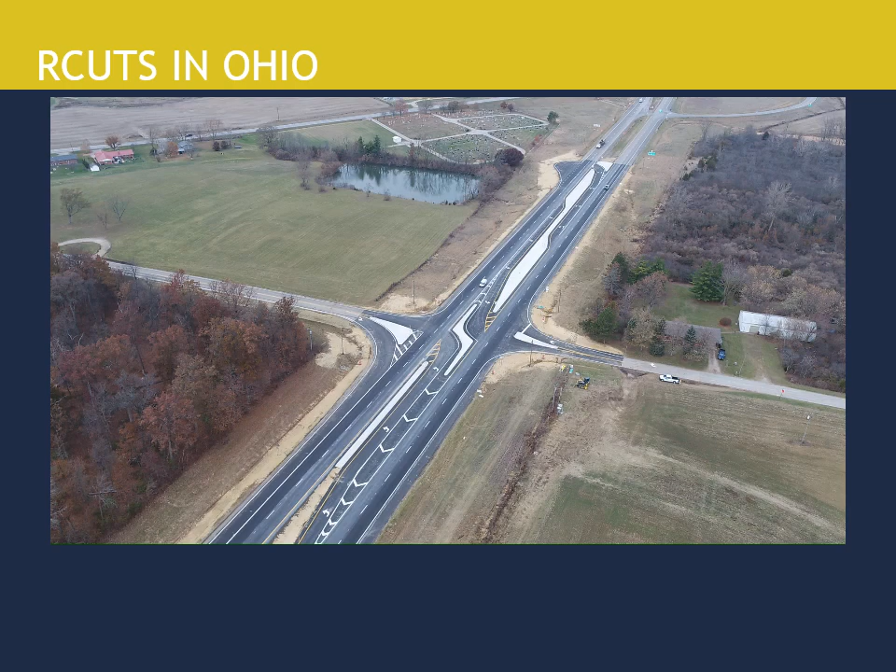But what is an R-cut? Well, instead of crossing over 4 lanes of high-speed traffic on a divided highway, drivers will wait for a gap and turn right in the same direction as mainline traffic, utilizing a designated acceleration lane. This acceleration lane will keep side street traffic entering from a stop condition from merging with mainline traffic traveling at a much faster rate of speed. From the acceleration lane, traffic will safely turn downstream to a median U-turn and turn left to head in the opposite direction. All traffic movements through the intersection, whether it be crossing, left turn, or right turn, are accommodated by an R-cut.

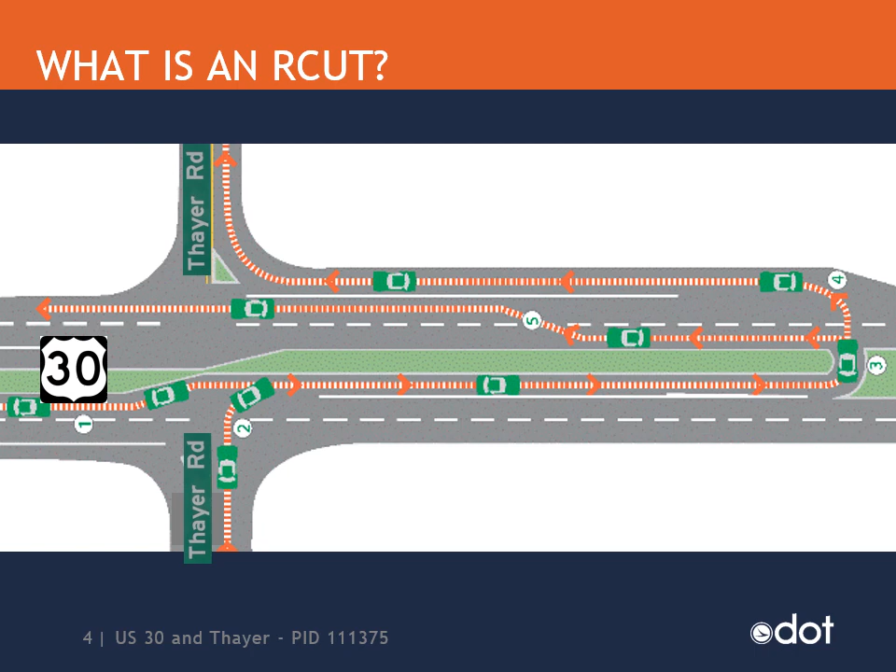A typical crossing on a 4-lane divided highway has 32 possible conflict points, or points where opposing vehicles cross paths. What's worse is that the majority of these conflict points often result in severe, high-speed crashes from opposing directions of traffic. These types of crashes, head-on, T-bone, or high-speed rear ends, frequently lead to serious injuries or fatalities.

However, by installing an R-cut, the conflict points can be reduced to 14 or fewer depending on the specific layout of the R-cut. Typically, this will result in less severe crashes with mostly same direction traffic, such as sideswipes or lane changes. Most importantly, these improvements have been proven to reduce fatal crashes by 70% and injury crashes by 40%.

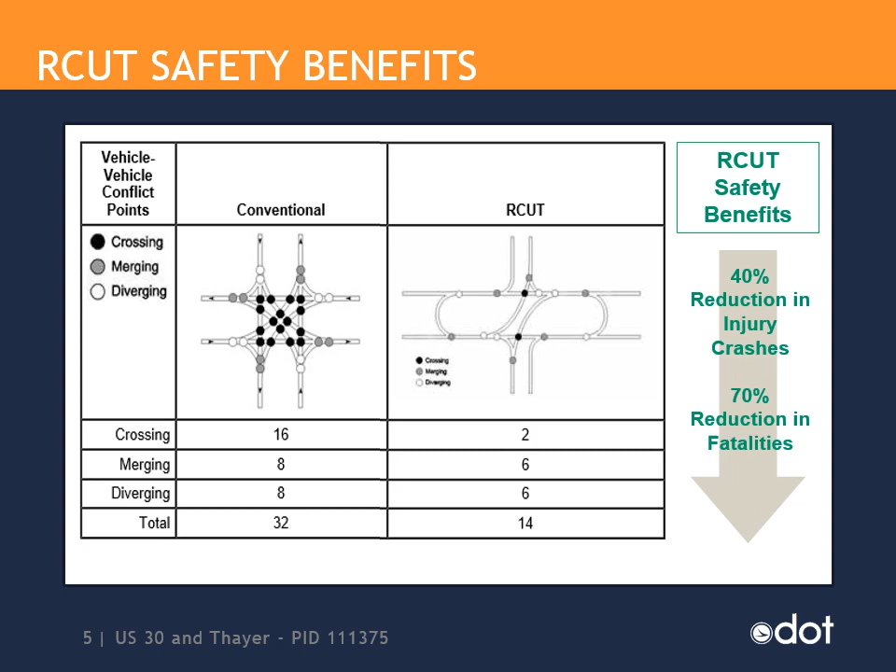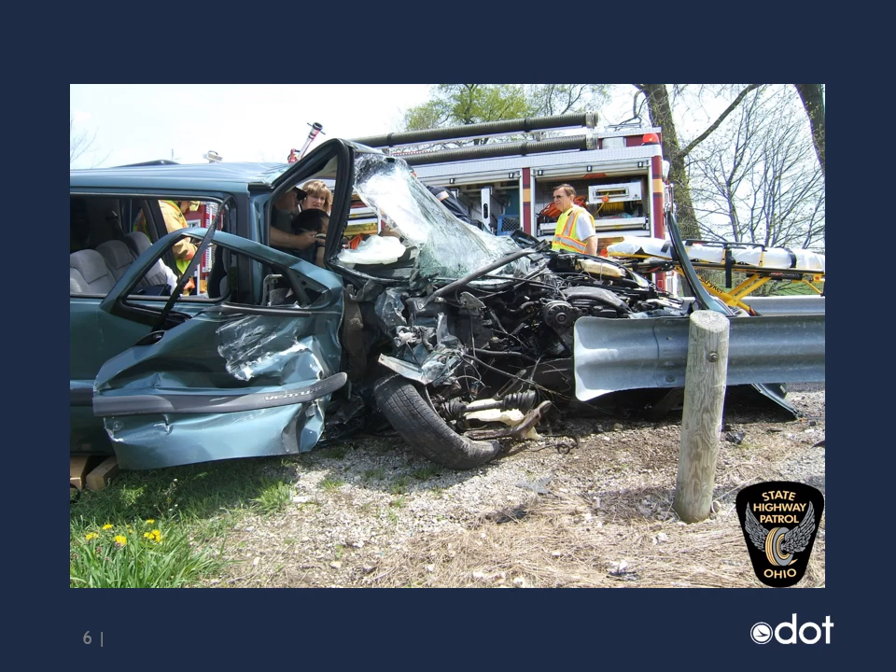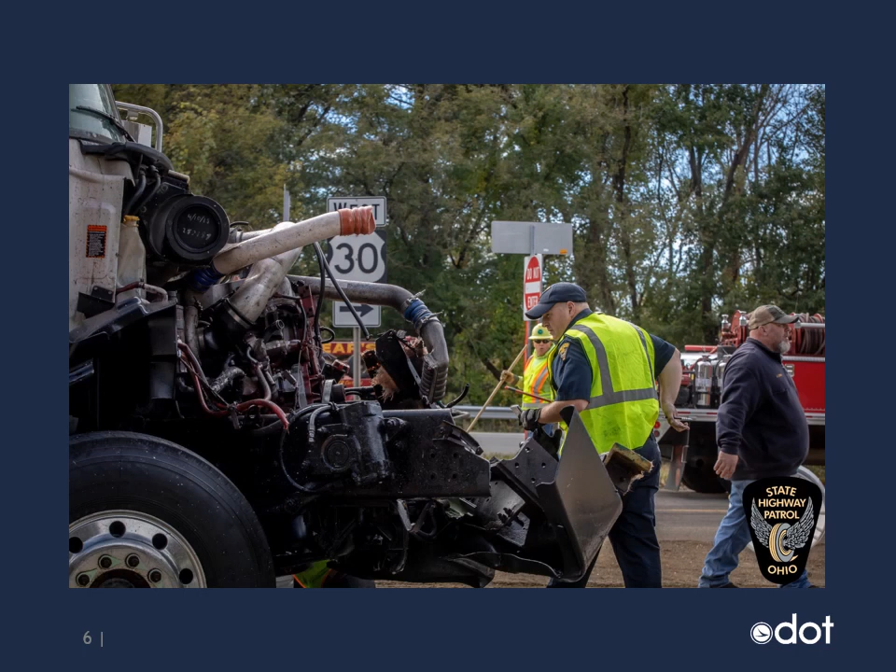I'm Sergeant Ryan Papura with the Ohio State Highway Patrol. Oftentimes, the crashes that troopers respond to at grade intersections are catastrophic, where the potential for loss of life or severe injury is high. Vehicles traveling at highway speeds can have devastating effects when striking a vehicle that fails to yield at an at-grade intersection. R-cuts will not eliminate all crashes from occurring, but they may translate those crashes that do occur into sideswipe or lane change type crashes, possibly reducing the severity of a traffic crash and making it safer for the motoring public.

This short video shows the operation of a typical rural at-grade intersection with a 4-lane divided highway. This is very similar to what we are currently experiencing at Thayer Road. Let's watch.

Although drivers will have to drive slightly further to get to where they want to go, R-cuts can take the same or even less time in comparison to when drivers must wait for an appropriate gap to cross a divided highway. When making left turns or through movements, a driver is dealing with 4 lanes of traffic going in 2 opposite directions. Larger vehicles, such as this semi, or commercial or agricultural vehicles, must wait for all 4 lanes to clear because there is not enough room to sit in the median.

This can result in a traffic backup, also known as a queue, on the side streets. Queues can add significant delay to crossing an intersection. However, when navigating an R-cut, all traffic is only concerned with making a right turn into 2 lanes of traffic going in a single direction. Decision-making is simplified, and queuing is less likely to occur, creating a safer, more efficient intersection.

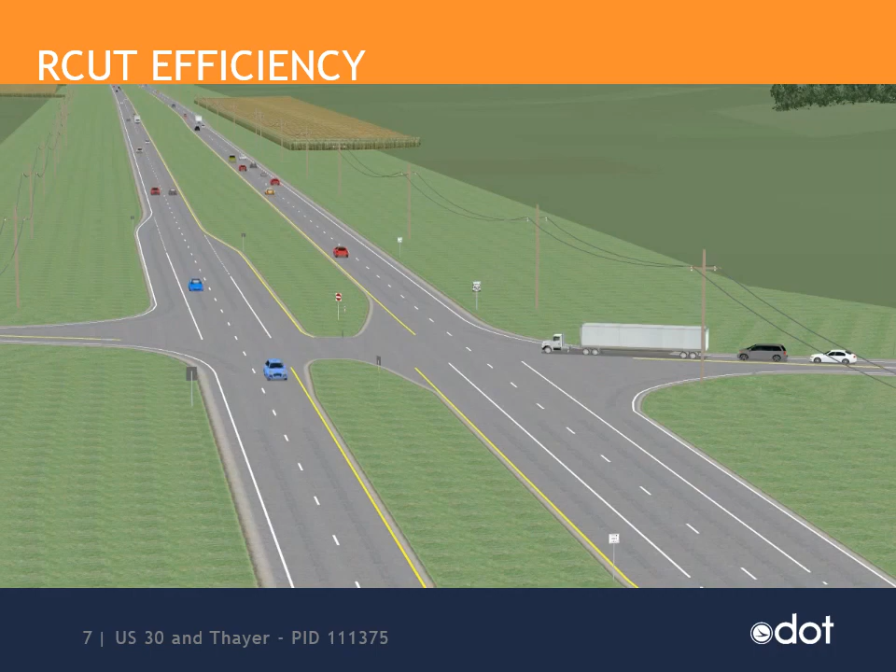Hello, my name is Angie Boyce, and I am the Project Manager and Senior Transportation Engineer with Stantec Consulting Services, Inc. out of Columbus, Ohio. We are working together with ODOT on this project located in Allen County along US 30.

Over the next few slides, I will further discuss the background and need for this project, the intersections that will have altered access to US 30, and the new suggested traffic routes once the intersections are modified. There will be a few short videos of vehicle and farm equipment simulations navigating the R-cut, and lastly, I will give a quick overview of the project and construction schedule.

In 2019, the Ohio Department of Transportation District 1 conducted a long-term corridor access study to identify improvements that could be made to the at-grade intersections along the US 30 corridor. This study involved identifying a long-range plan for all the at-grade intersections along US 30 in Allen County and some in Hancock County. A controlled access highway requires removing or modifying at-grade intersections, making direct access to the highway prohibited.

Doing this greatly improves the overall safety of the highway by reducing crash or conflict points at these intersections. Safety has always been a top priority for ODOT, and at-grade intersections have become a focus due to the upward trend in critical and fatal crashes. The information obtained from this study was utilized when developing feasible alternatives for this project.

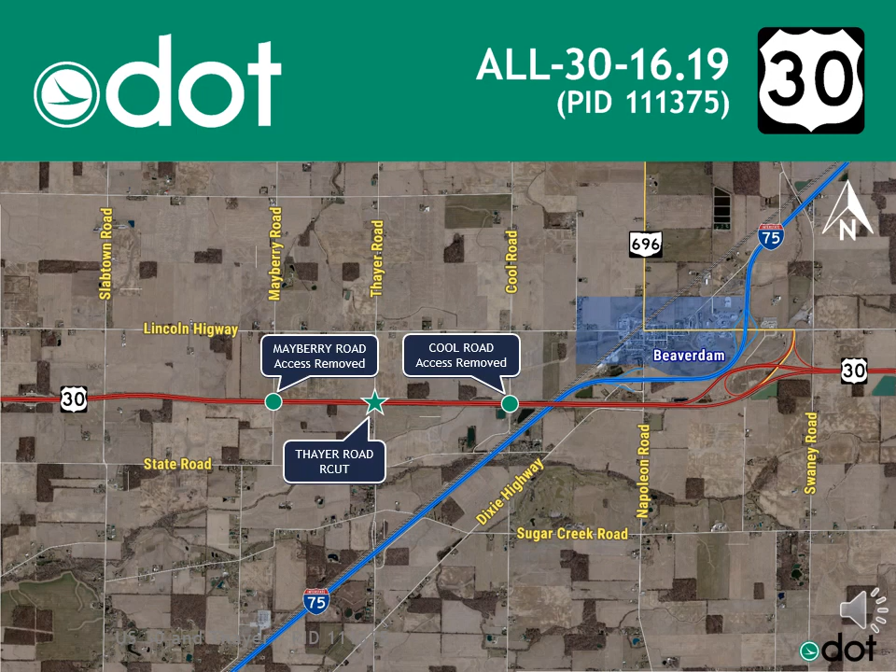After careful consideration of all these factors, here are the recommendations for the following intersections. Mayberry Road and Cool Road will have direct access to US 30 removed and will become cul-de-sacs. The intersection of US 30 and Thayer Road will be modified into an R-cut, which was explained earlier. Over the next few slides, I will explain these proposed modifications in more detail and discuss the new traffic routes.

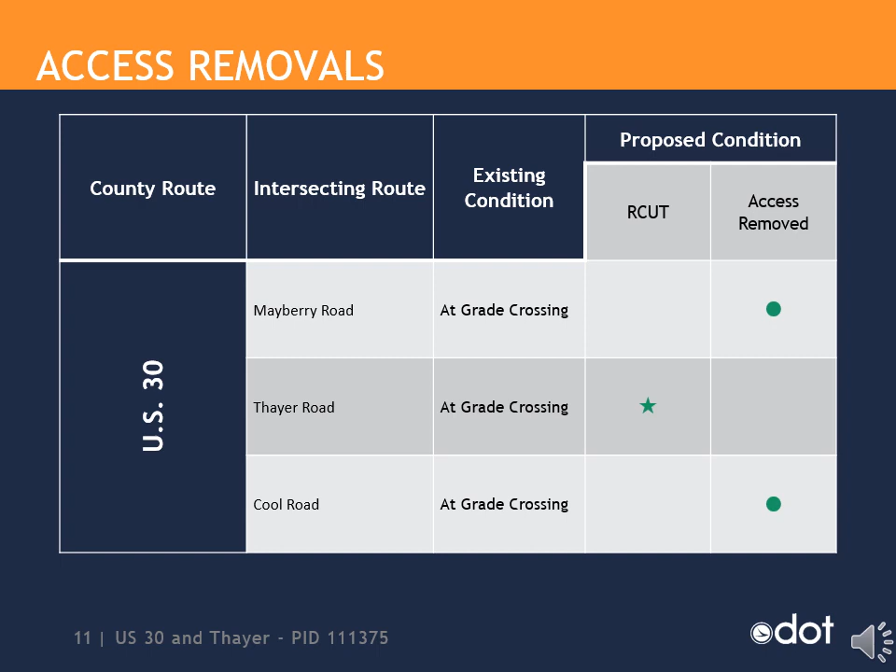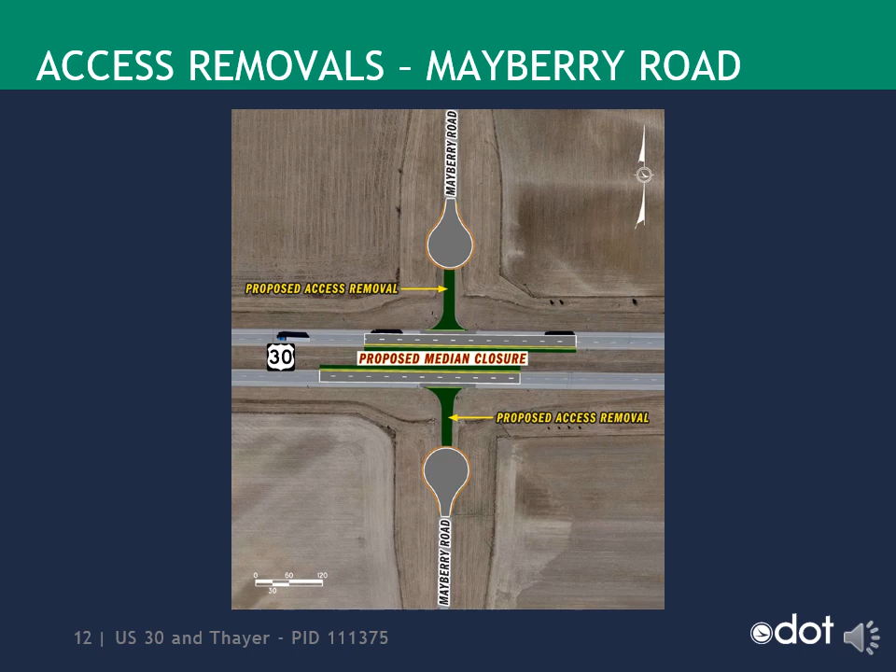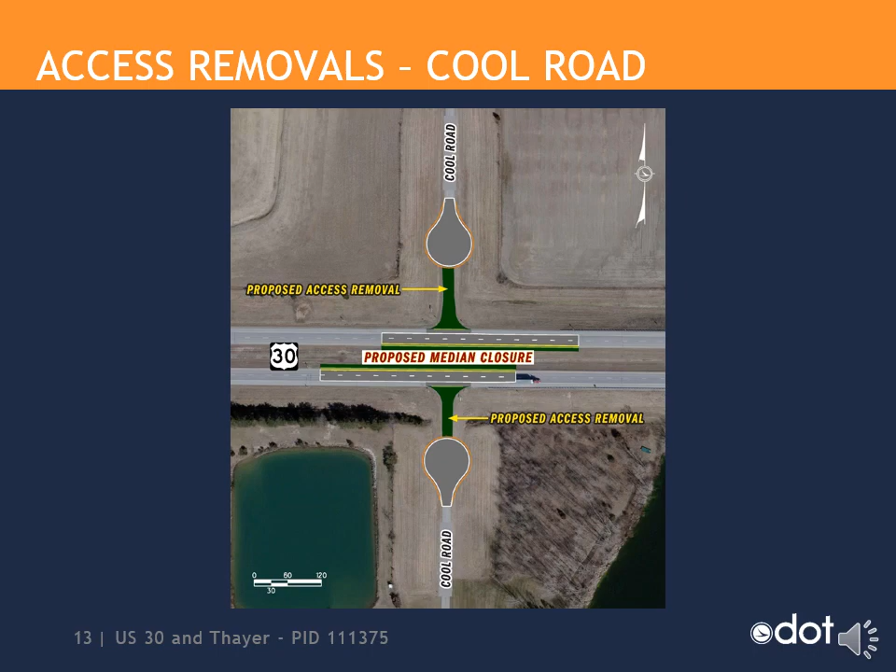Like Mayberry, the modifications to Cool Road will include complete access removal from US 30. The local traffic will be able to access US 30 from Thayer Road. An alternate but longer route would be to access US 30 from Lincoln Highway. Again, the shaded green area represents the existing pavement that will be removed on both sides of US 30. Outside ditches will be restored, along with the median pavement being removed and replaced with a grassy median.

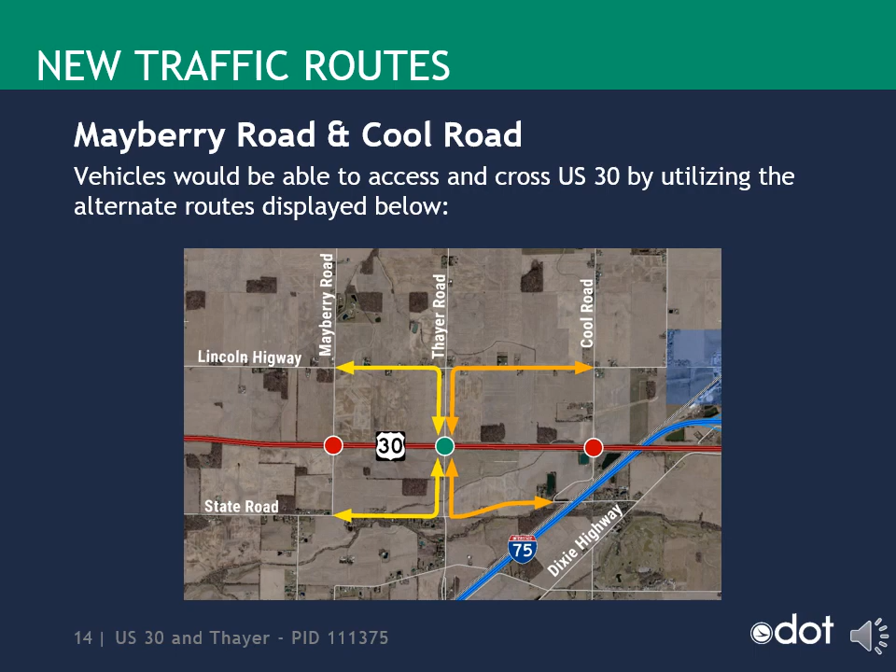This slide shows the proposed new traffic routes when access is removed from Mayberry and Cool Roads. Although it may seem inconvenient to drive a few extra minutes to access US 30, removing these intersections will greatly reduce traffic accidents and the severity of those accidents.

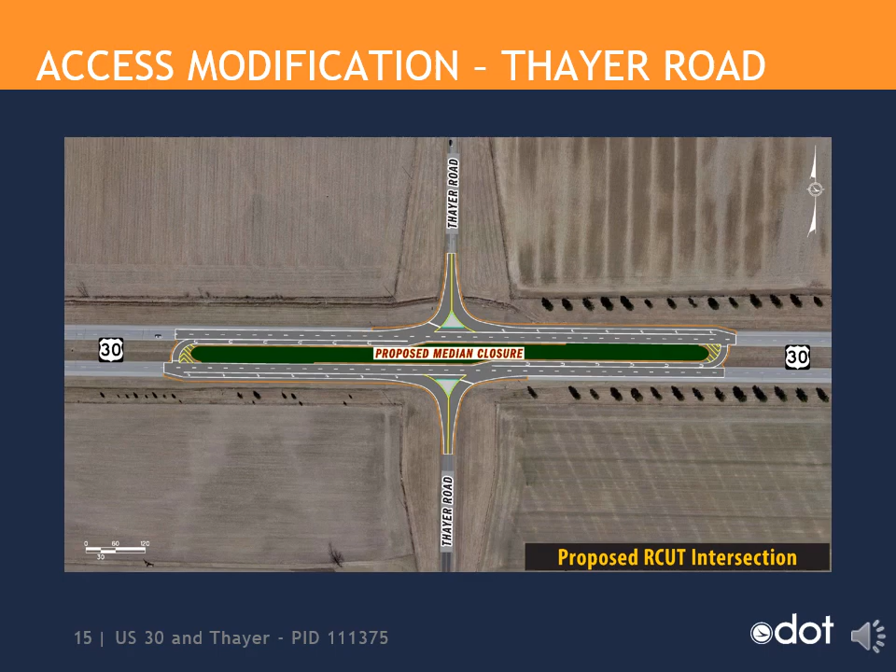An R-Cut is a proven and affordable countermeasure that will benefit everyone by greatly reducing the conflict points and queuing time on the side roads as described earlier. Therefore, the intersection of Thayer Road and US 30 will be modified into an R-Cut in order to maintain access to US 30. ODOT understands that there are farmers that use and/or cross US 30 to get from farms to fields. The R-Cut also provides a safer intersection for farm equipment and other slow-moving vehicles.

Here is a simulation showing an overview of traffic maneuvering through the R-Cut. Vehicles on Thayer Road will only have the ability to turn right onto US 30 either to continue traveling on US 30 or the vehicles can safely get into a left turn lane and make a U-turn. This has been designed for both a large semi-trailer as well as farm equipment. The median U-turn opening is over 50 feet wide, which is plenty wide to accommodate the turning movements of both design vehicles.

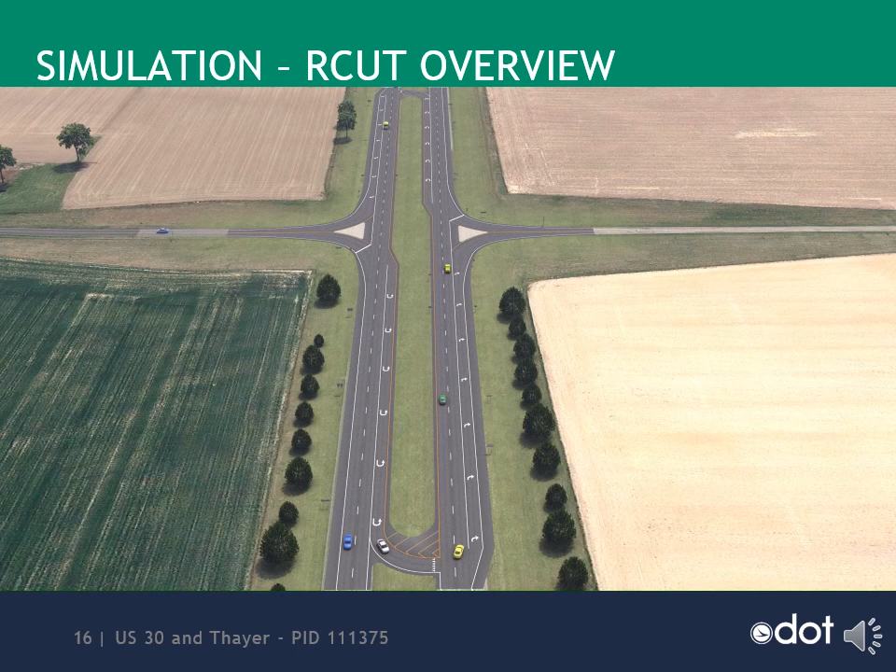In this simulation, we are showing the driver's perspective when traversing the R-Cut starting northbound on Thayer Road, making the right turn onto US 30, making the U-turn, and then ultimately heading westbound on US 30.

Our next simulation shows a combine pulling a header cart as it travels through the R-Cut. As you watch the video, you will see that there is plenty of room for this vehicle to make the U-turn movement. The R-Cut has been designed with the large wheelbase of a combine in mind.

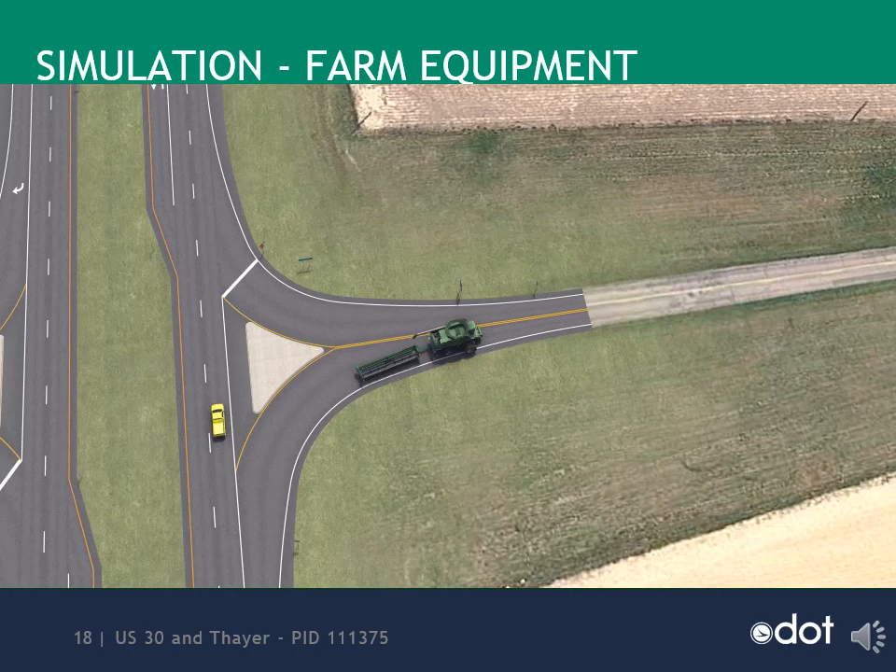ODOT requests your comments by August 29th. Once the project team has evaluated all comments and determined the final alternatives for each intersection, detailed design proceeds until February 2021. The project will be awarded in May of 2021, and the construction period scheduled to be from August 2021 through November 2021.